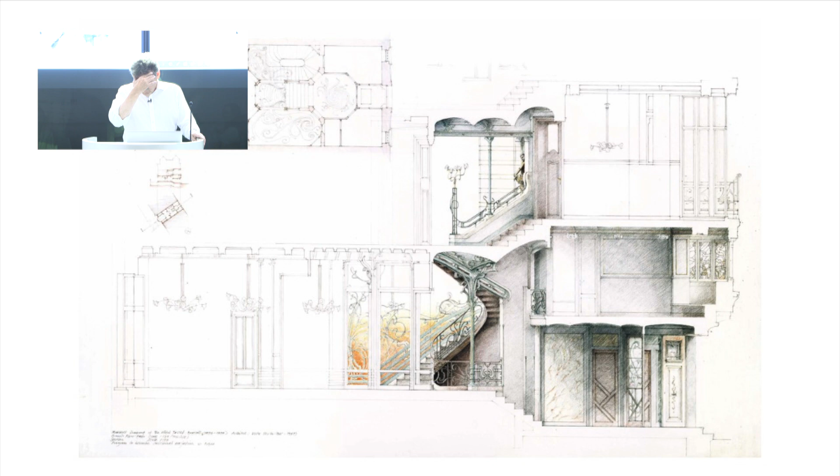I wanted to talk a little bit about that background of making bridges and the interest in materials. This is a drawing I made with a fellow student back in '85, of Victor Horta's Hotel Tassel, which is like the birth of Art Nouveau in a way.

It was a building that had been turned into multi-let, and degenerated—1894 in origin—and then had been lovingly put back together by a group in Brussels, and was about to become the Mexican consulate, as it happened. So we tore in and drew this kind of one-to-one almost, and made this drawing.

The thing about this building, as you can see from the plan, is that it's actually a building between two party walls, very tight. It was for an academic. It was also at the time, obviously, of symbolist poetry, of interest in psychoanalysis and the interior. But it's also the first domestic building to use metal, and the metal opened up the entire world in this.

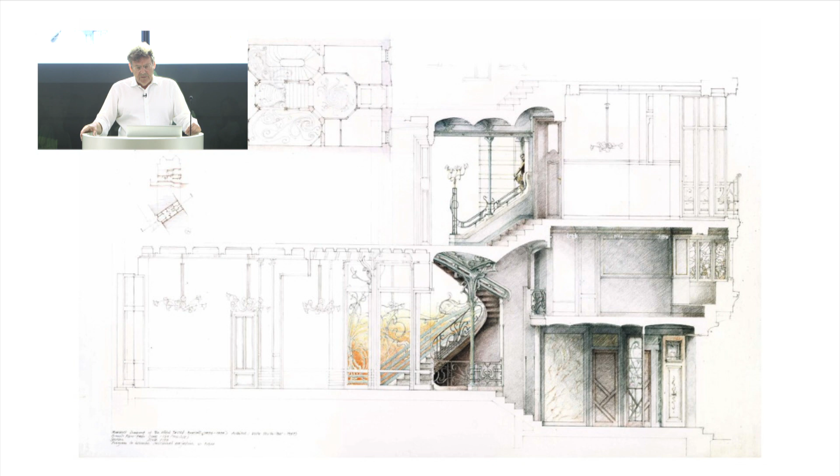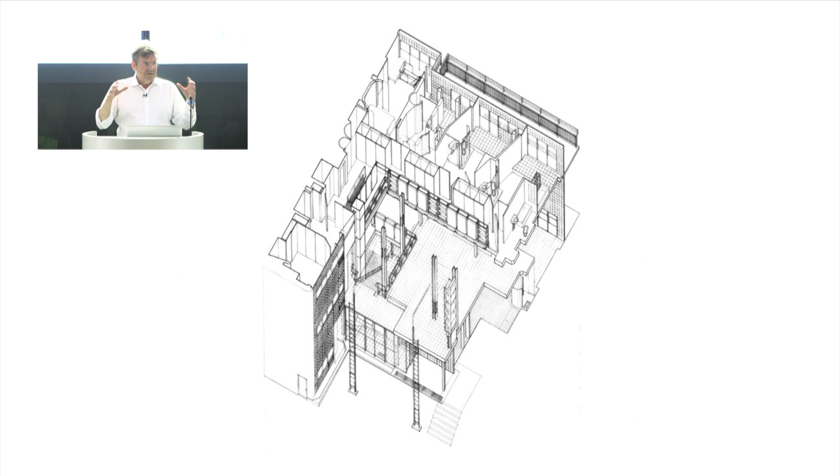So if I was to talk about metal, I would be starting with, no doubt, Horta. I would then be moving to the inevitable sequence of the use of metal with Pierre Chareau and the Maison de Verre. I suppose what I'm saying is thinking about the use of material in its cultural context, because these moments are fascinating in terms of the way they tune in to a particularity of place.

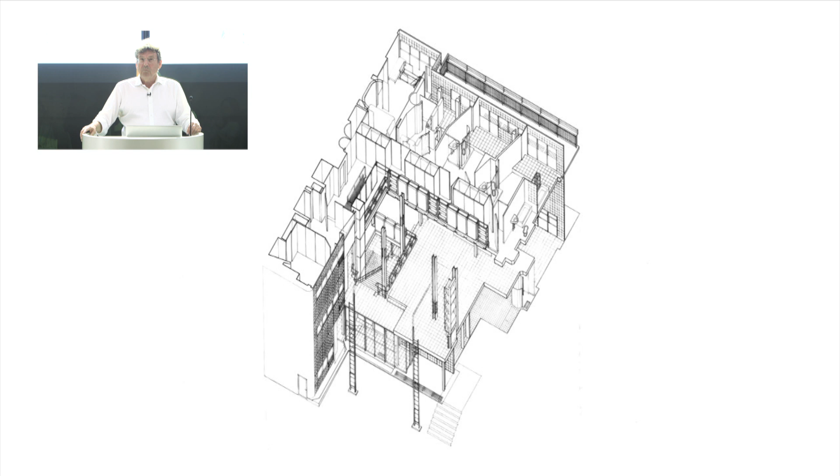You wouldn't have Victor Horta and the Hotel Tassel without party walls and terraces and a particular urban structure. It wouldn't make sense. So I suppose the question I ask is: when we think about ceramics, how do we culturally think about ceramics? Where is it critical? From my own background...

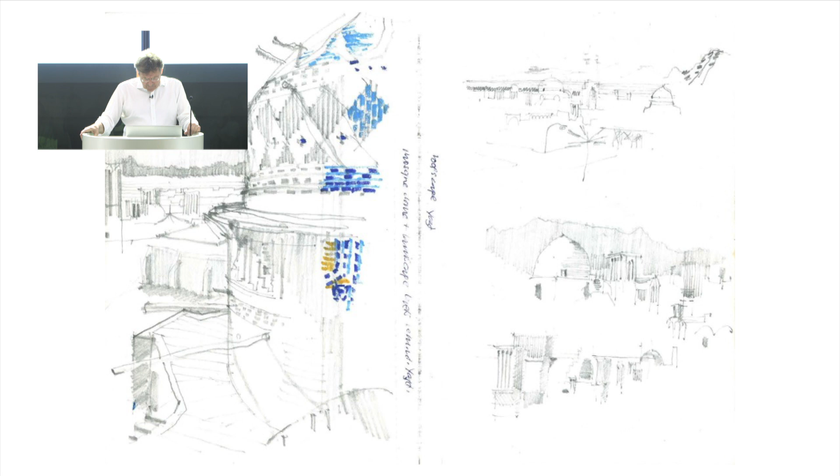I spent a year looking at nomadism in Iran. These are a couple of pages from a sketchbook from 1974 in Yazd, Iran.

You get up into this world, which is basically a desert city built into the ground, with these famous badgir, the wind catchers, which you can see in the silhouette of distant hills. The water comes underground to cisterns, so everything is subterranean, but then it bursts vertically, in this incredible way—something about the baked earth, domes, a lack of timber in that circumstance, the earth and the sky, and how one mediates between the two. There's this incredible tradition in Islamic architecture, particularly in Iran.

If you've been to Isfahan, you'll have seen these extraordinary ceramic-clad earth structures that give protection but also amazing beauty in terms of their craftsmanship, incorporating—given the question of iconography and Islam—word, calligraphy, and plants, a kind of heavenly place on earth. It's a very, very potent condition, an example of the use of ceramics.

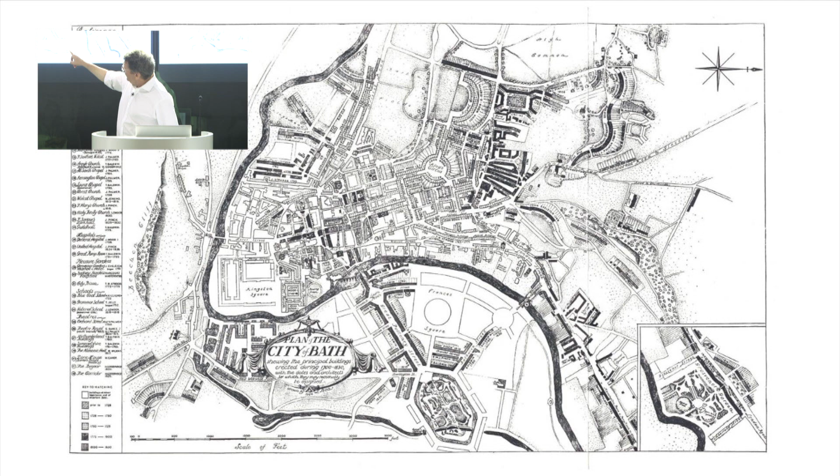Within the lozenge there's a sort of intestinal-shaped garden, which is actually a pleasure garden. The pleasure garden in the English context, particularly in the 18th century, is very important.

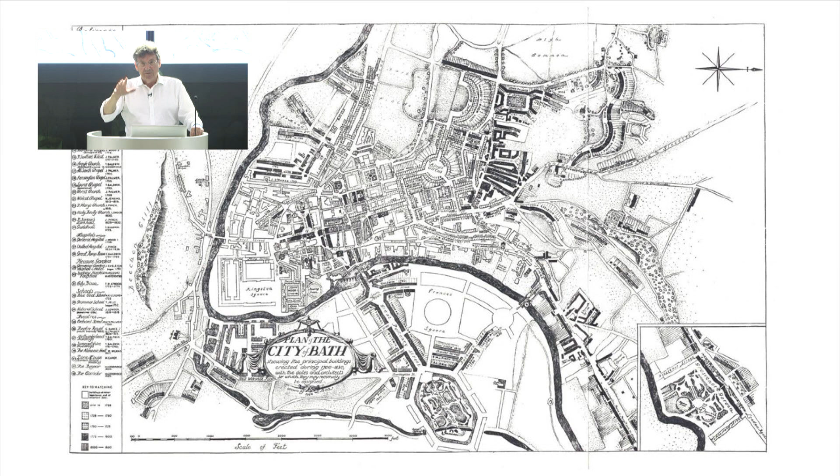This was pre-railways—you couldn't get to the coast, you couldn't get to the edges further afield. So the pleasure garden was a place that at twilight would become full of apparent bird song, actually completely artificial.

You'd have an orchestra in there somewhere. You went from that classical facade through the building and came out on the other side to these dining boxes arranged in a great arc on either side, with a veil beyond. You heard music coming from the band playing above you—it was all about the inversion, the artificiality of pleasure within a town, an artificial nature.

But then it declined with the railways and became this rather dull facade, remade by a worthy architect who changed the building to house a beautiful little collection belonging to a traveller called William Holburne. It's now a museum called the Holburne Museum.

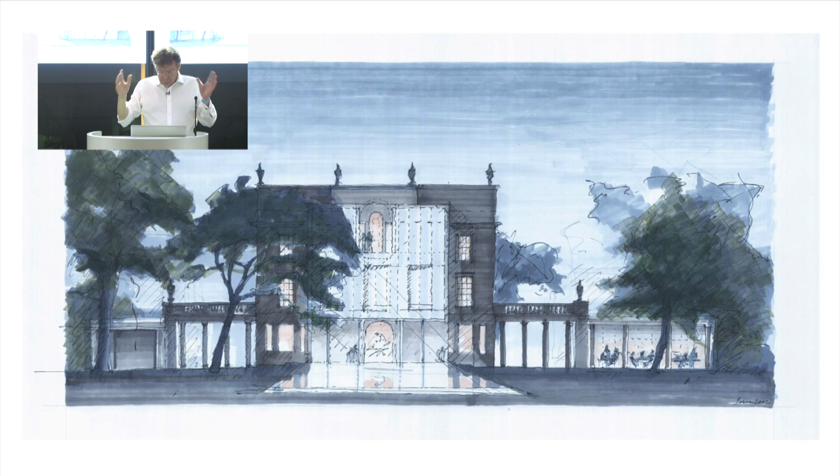My first instinct was not to use ceramics—it was glass, and timber behind—but the idea was that you'd be going from a rather solemn classical exterior into this wonderful garden.

Very briefly, the existing condition was the building left by Blomfield, who had blocked the axis through which you used to come. This is a listed building, so it's sacrosanct—one of our jobs was to pull the stair to one side so you could re-engage that passage.

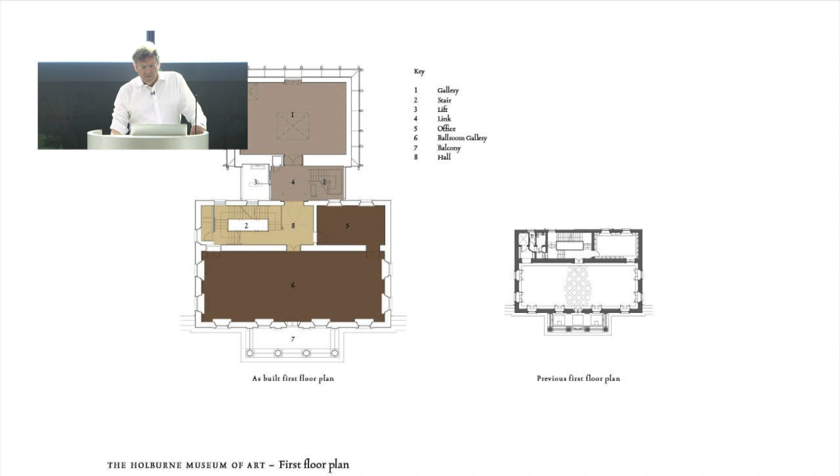I'm not going to dwell on it at great length—then you proceed upstairs. He did bequeath some very beautiful big rooms, and connectivity across the garden is uppermost.

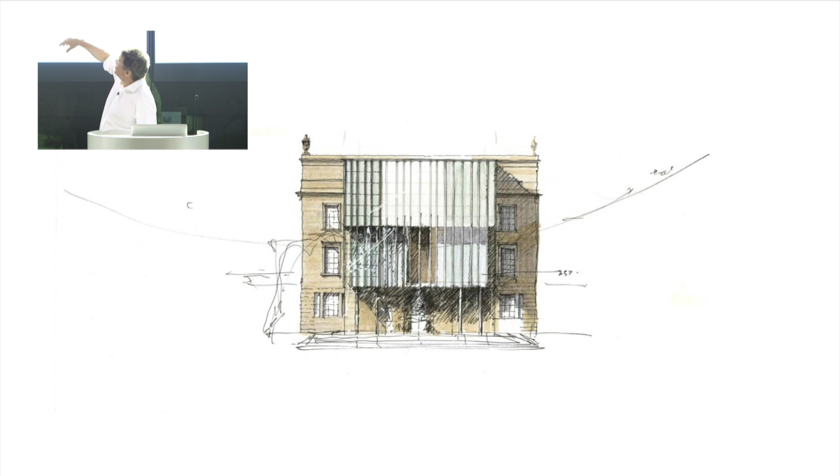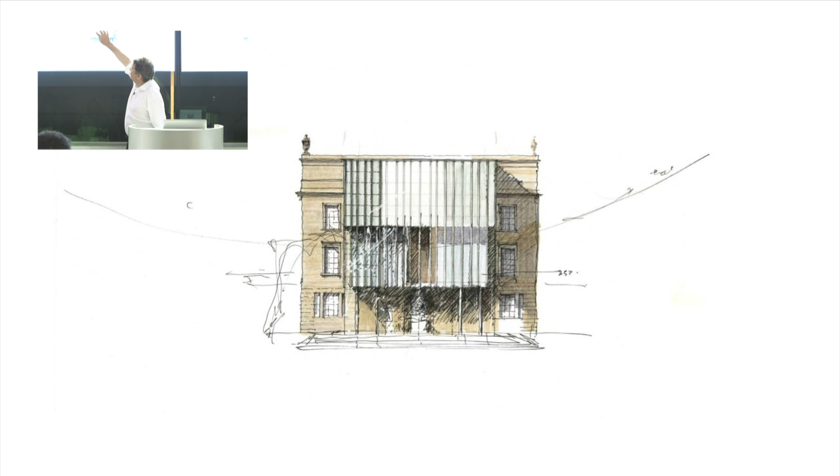So this was my first sketch, and I was interested in reflection and something that would levitate. This first sketch was about a tripartite idea, remembering that competition sketch, which had got to the point of thinking about a closed box at the top, top lit, as an exhibition space for temporary exhibitions, upon which the lifeblood of a small museum works, housing the Holburne Museum, the original collection in between, and then a very open public space at the bottom.

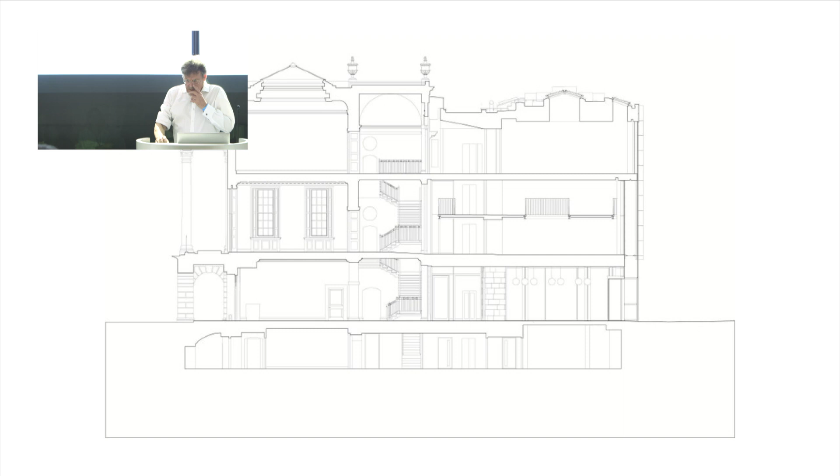And I started to think about ceramic, and that was an interesting perception, intuition. This is the section through the historic building and the new building with these levels. I say it was interesting because,

touching this building, and conservation is very big, here and also in the UK. And I think at the first planning application, we had 1,200 respondents. Probably that doesn't sound like a lot, but 1,200 people writing, mostly to bitterly complain. So it failed on the first round and then finally got through.

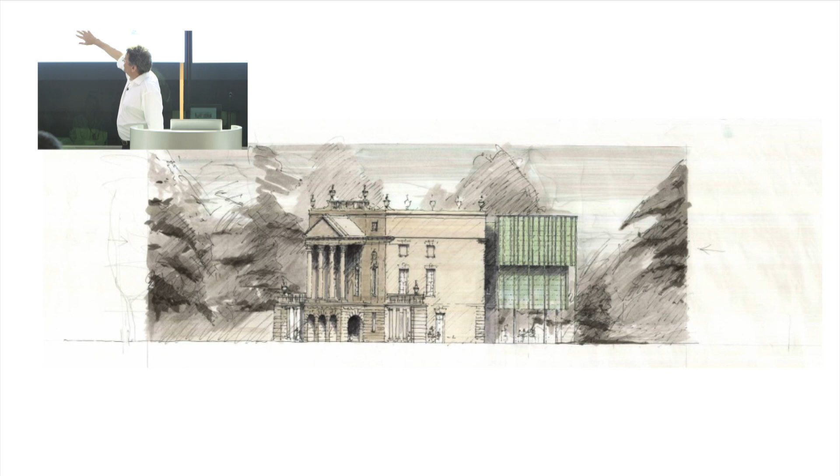But it was about inverting the idea, because it's a Janus-headed project, classical frontage, pleasure garden on the other. Stone works in a way that gathers weight through rustication from the urns that are the connection to the sky. Ceramic, I was very happy to levitate. It's somehow artificial, so this idea of ceramic was interesting to me.

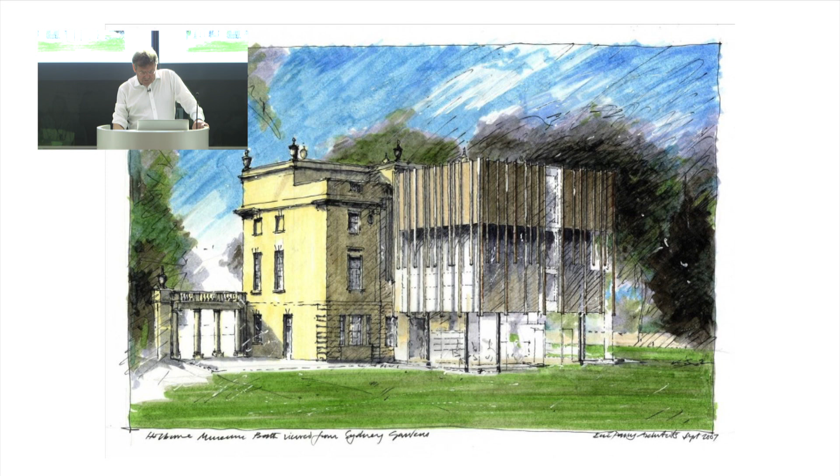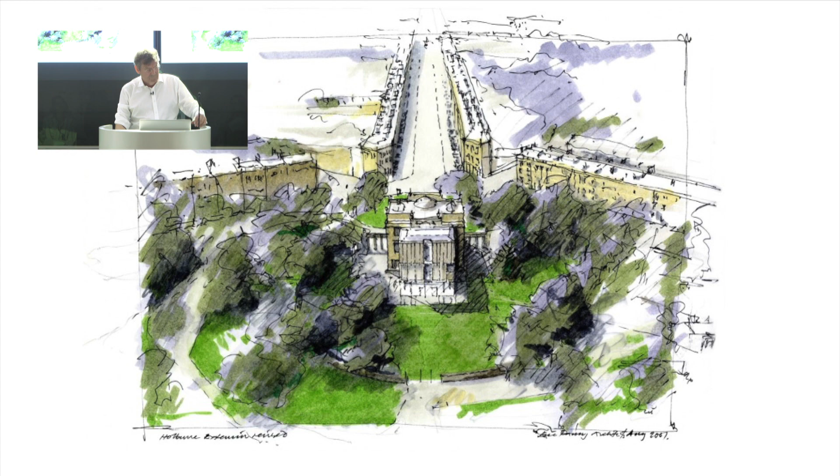But in the first instance, the powers that be determined that if it was going to be ceramic, then it should look like stone. So there's a big problem. This drawing is about the difficulty of that. And I needed darkness to reflect the trees and the sense of nature, to give a kind of mystery.

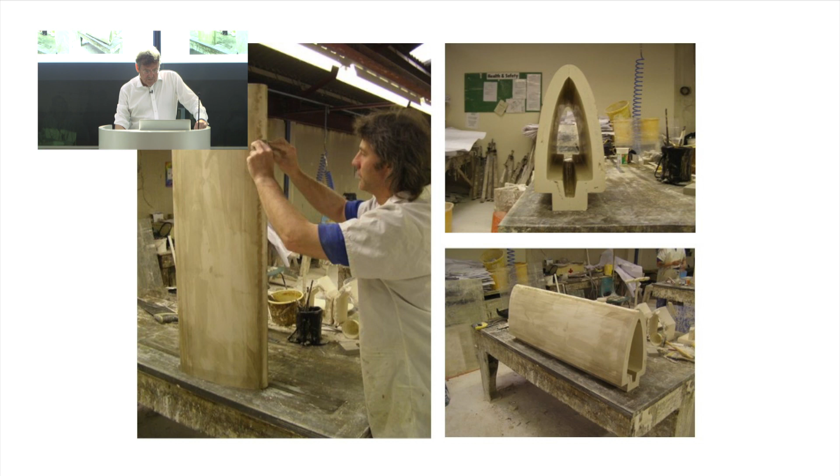So anyway, it went to Shaws of Darwen, who won the contract. It's slip-form material. They produced some early glazes, which were very light.

I was talking about the ambiguity of the color, the eye that has a certain kind of depth, the character of the surface. So I was interested in depth, but I wasn't getting there.

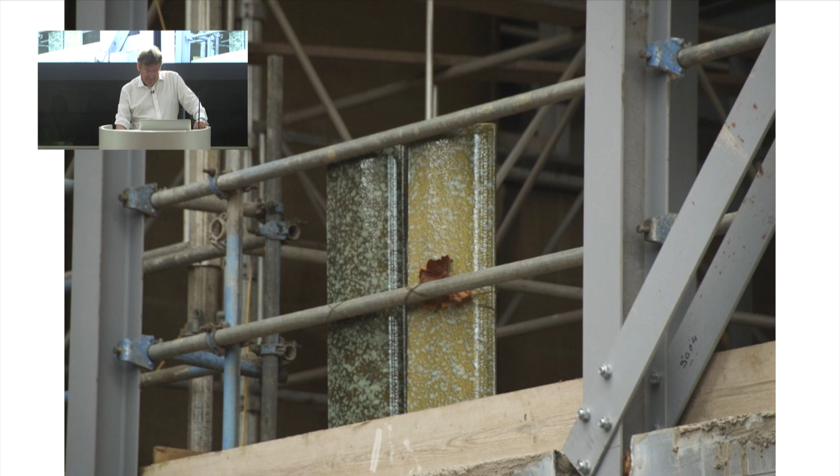And then we started to get to where I wanted, which was a manganese oxide, deeper color underneath, and a titanium white that was placed on top. So the left-hand sample begins to get closer to where I wanted.

And I persuaded the people that the buttery stone of Bath isn't necessarily the case when you get to the north-facing shadowed world. I mean, stone is not something that is uniform. So I was arguing this as a way of progressing.

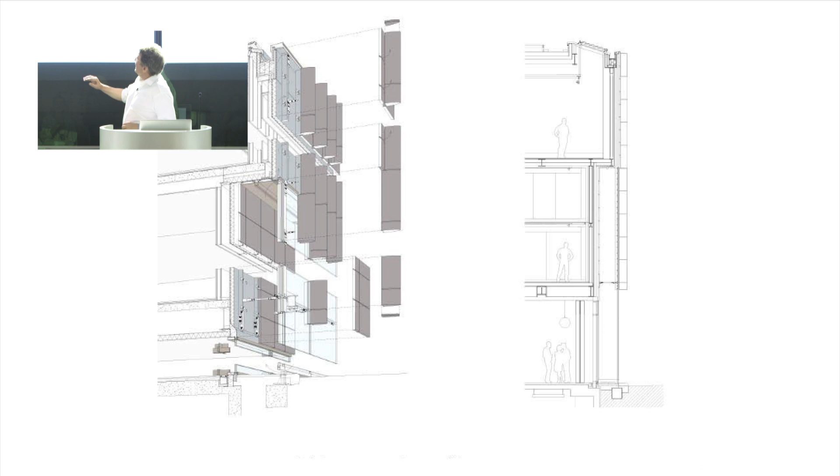So to the construction drawing, which is essentially, I didn't want the exhibition of a grid, as it were, on the ceramic. So these finials cover the vertical grid and allow a kind of ordering that is vertical to exist. On the outside of the top layer, the secondary layer has an inner lining of ceramic panels, all slip-formed. And then below that, it's glass and glass, it's glass and ceramic, it's ceramic. So that tripartite sketch starts to manifest itself in this way.

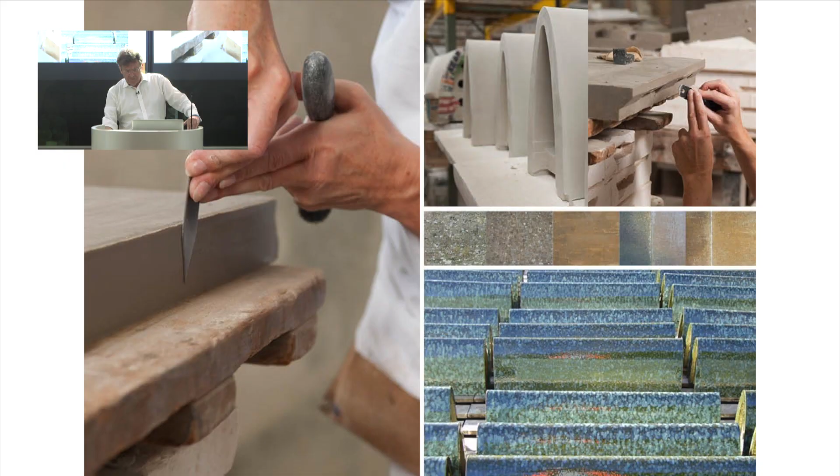And this was the process that we know, understanding it, everyone is focused around the material in the room. And then the question of how the glazes, a double glazed, once fired technique developed to create that sort of sense of lack of consistency. It's using the glaze as something haptic, crafted, and here the finished article sitting in its garden setting.

The thing that this doesn't show is that there's something very beautiful about being in the space with the movement of trees that immediately gets picked up in the ceramic and the glass in different ways, creating very interesting shadows. So there's a depth, there's a layering, there's a sense of protection of the very precious things that are within. That changes through the seasons and through the day.

So the result has a certain kind of, maybe going back to that sketch, an idea. The structure is taken off the corners so that the bottom works with the environmental glass behind and a veil of glass drawn down on the outside, to create the calibration vertically in that tripartite way and to create this resonance with the landscape.

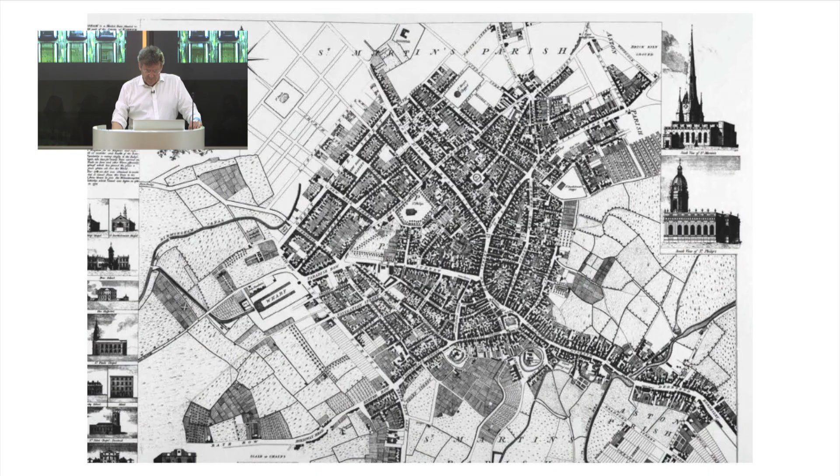But the other question in my mind is where can you take the material as extruded. So the Holborn project was small, quite expensive. Piccadilly was expensive—it's all hand-set in lime mortar, so your substrate has to be very strong, in the tradition of the use of faience in steel frame buildings.

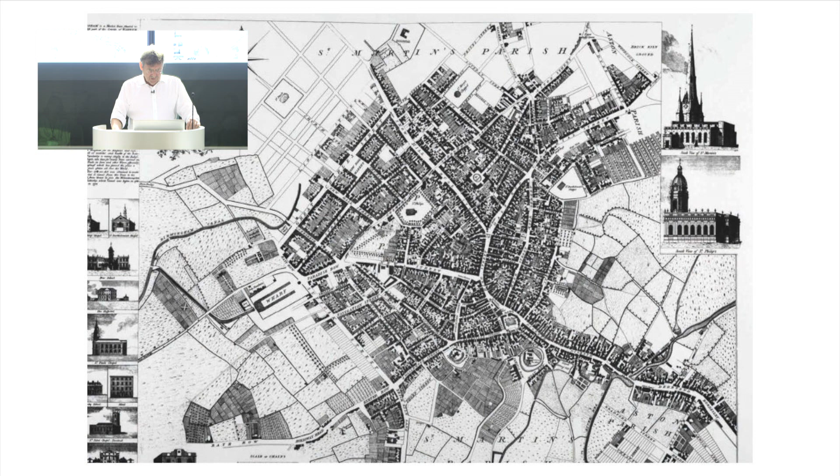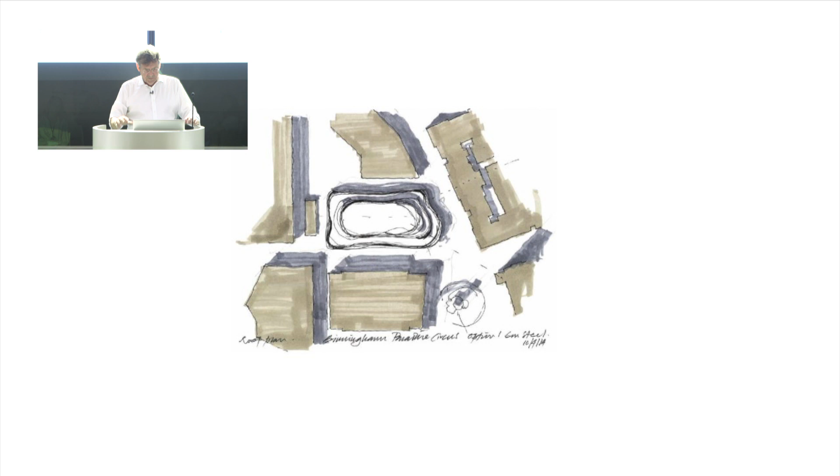We had another challenge in Birmingham, UK, with a set of buildings, new buildings near the historic centre. I'm just showing an early sketch, which was the plan form, or an idea for a plan form for a building that sat on its own but wanted to respond to a lot of different tensions around the site. So I thought of this kind of more organic approach to it.

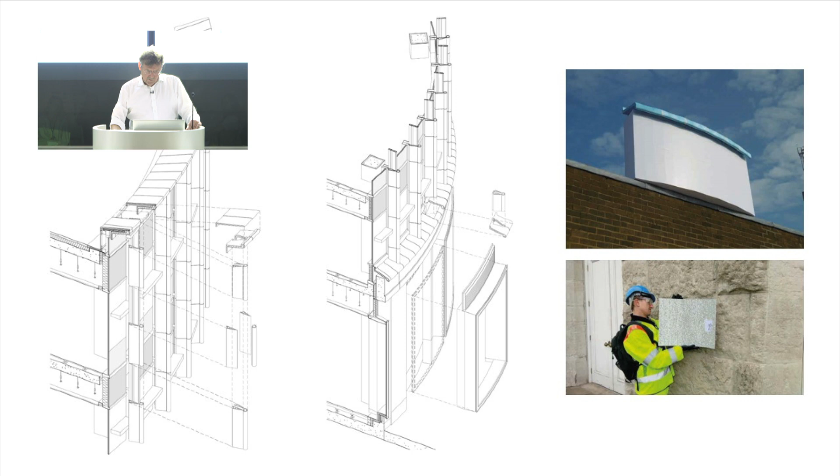So how to, with the budget, use a ceramic material that's extruded, that could actually work as something curved and be assembled in an interesting way.

So on the top right, you see a section of a radius that we built in our studio, with sections of a sill. This was the successful dimension for this radius, of about just under 400 millimeters, where the eye could be deceived with the shadow being faceted but actually appearing on that radius.

It was close to historic buildings, so there's a kind of thinking about the glaze as a simple glaze, learning a little bit from earlier on. This is undertaken with NBK, another one of the handful of greats in terms of production, doing a lot of work coming out of the baguette of Renzo Piano, and his Berlin project—maybe rain screens that are so popular.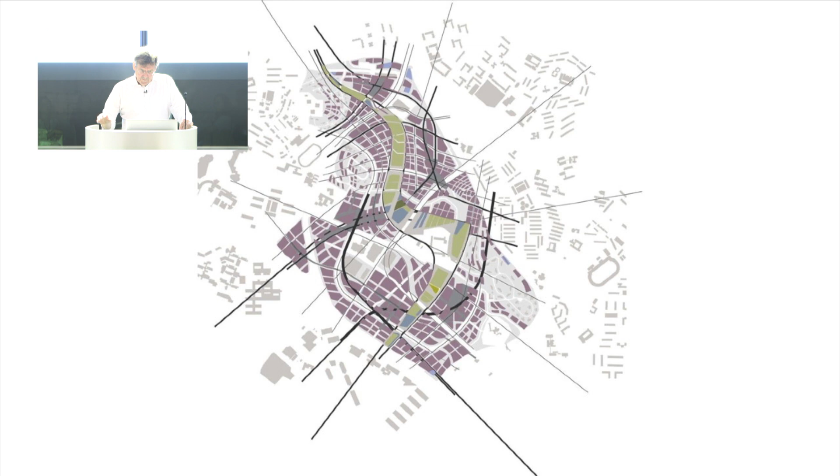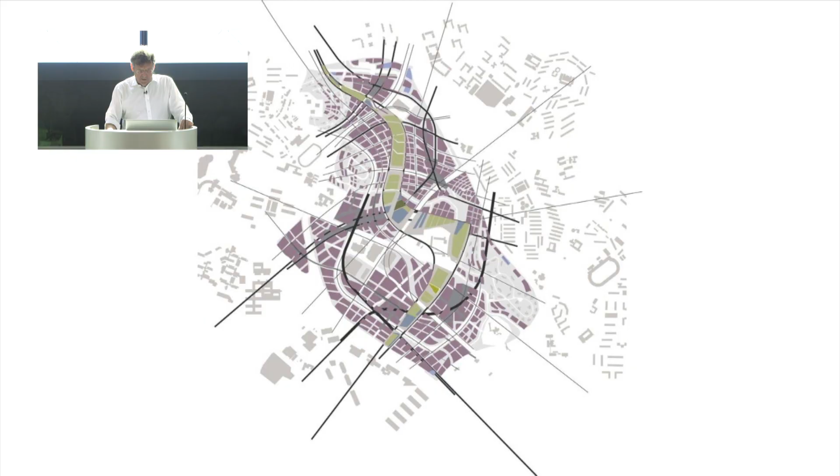So this project is fairly recent and takes that idea of the extruded material on a curved surface a little further. In Singapore, it was a competition—it's in a Zaha Hadid master plan for this sort of technology park. And Hadid's came up with a very good, I mean, you know, very fortunate for a designer, set of principles.

One reason is that because this particular building is next to a park, the public had to be able to walk under the building with a soffit at about 10 meters, and because it faced the park, it couldn't have too heavy a frontage to the park. So inevitably there was a sense of stepping back and lifting. So that's where we got to.

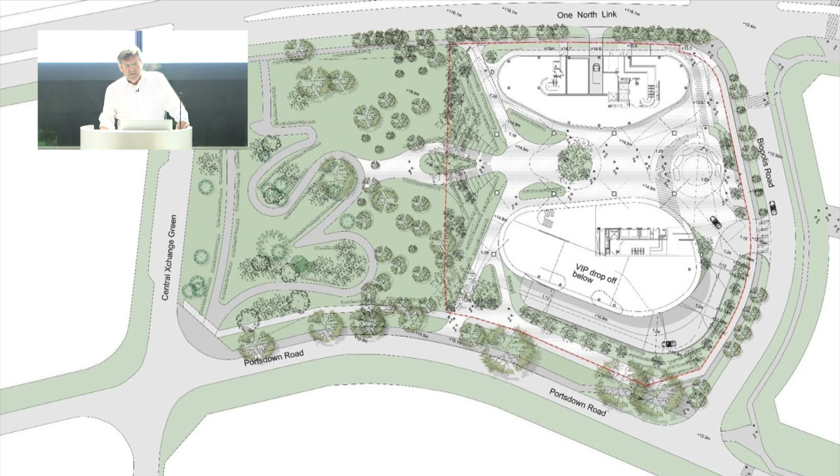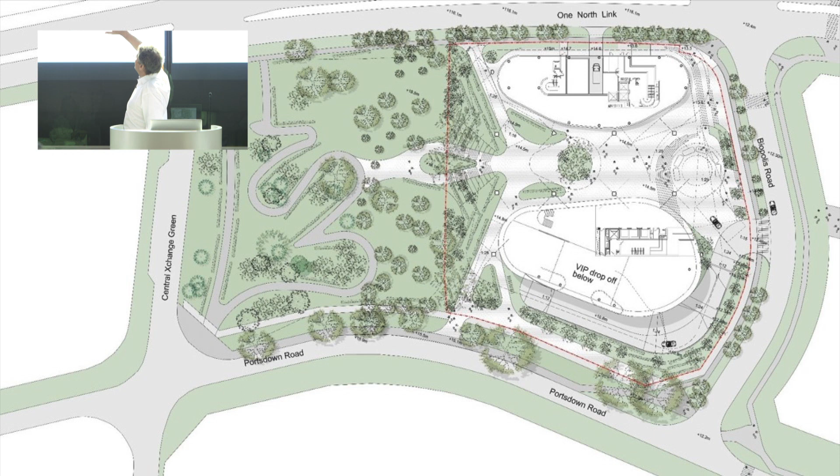Effectively it developed with this idea of passage of these structures, which are trees that pick up a 9-meter grid to a standard office plate above this, with two pods, one which contains an auditorium and is more introverted, and the other that is quite the opposite. It's about connecting, and then the public are walking through and under the building.

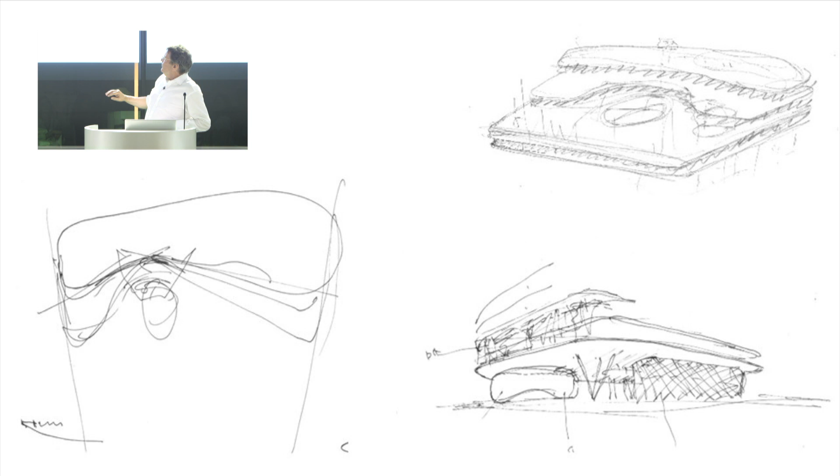So yeah, these were just my initial thoughts about it, that you could have a cushion almost that had the entrance and the auditorium. You could have a woven basket on this side, within which there are two cores, and then there are these inverted pyramids structurally that pick up in order to make a big dimension underneath for the public to pass through, and then it's stepping back.

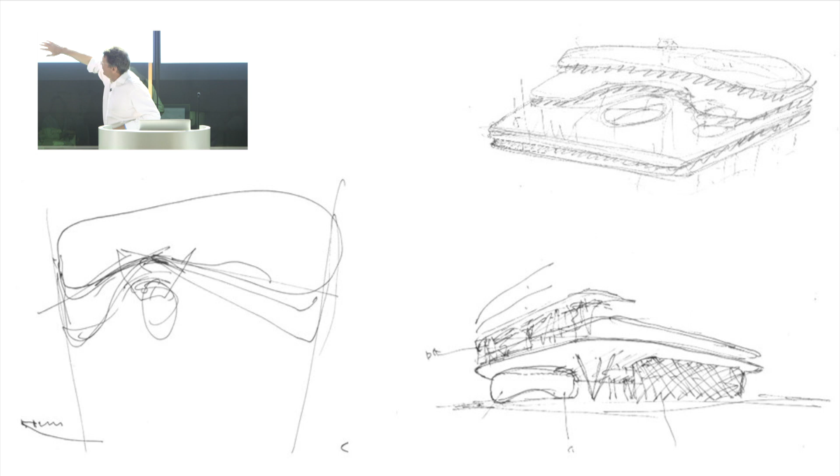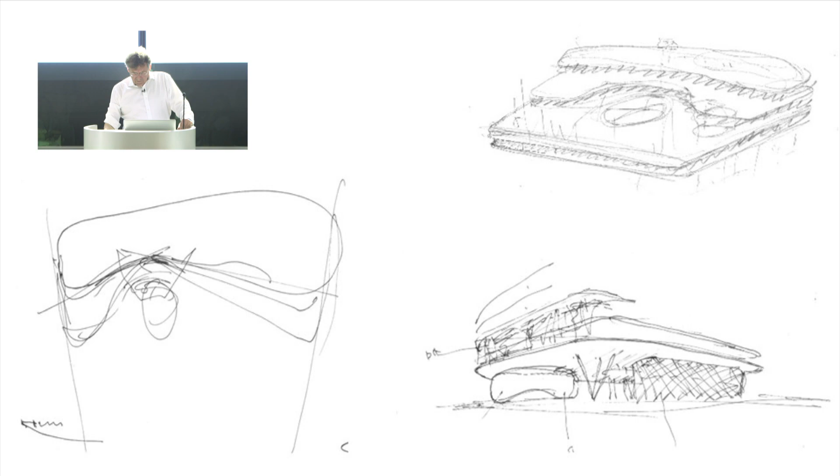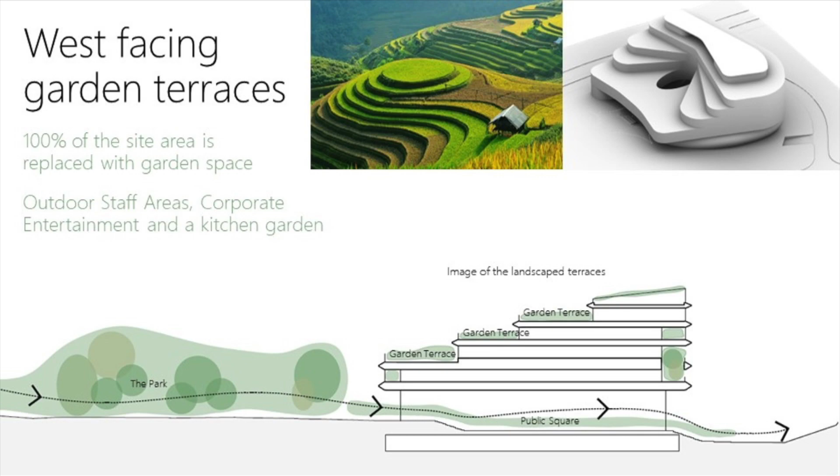It's a large floor plate, so allowing light through it, and planting those terraces to - which they do incredibly well in Singapore. Sort of the sense of the world of laboratory and office that this building is. It's about the agricultural world, and so a sense of terracing again seemed a good response with landscaping.

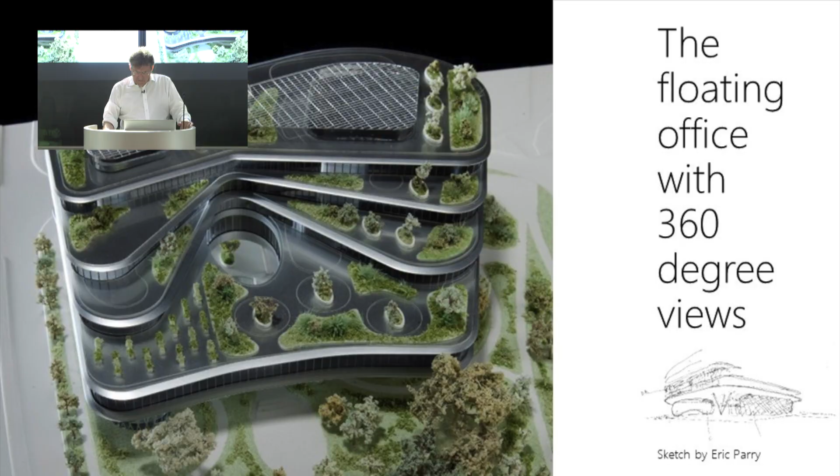And in the first instance, then, in my mind, it was a bit like a set of crockery that was stacked with large overhangs to create the protection that's absolutely necessary in that latitude to create shadow, so as to reduce the impact of solar gain. And so this was the initial model from that competition. At this stage, to be honest, the edge was indeterminate.

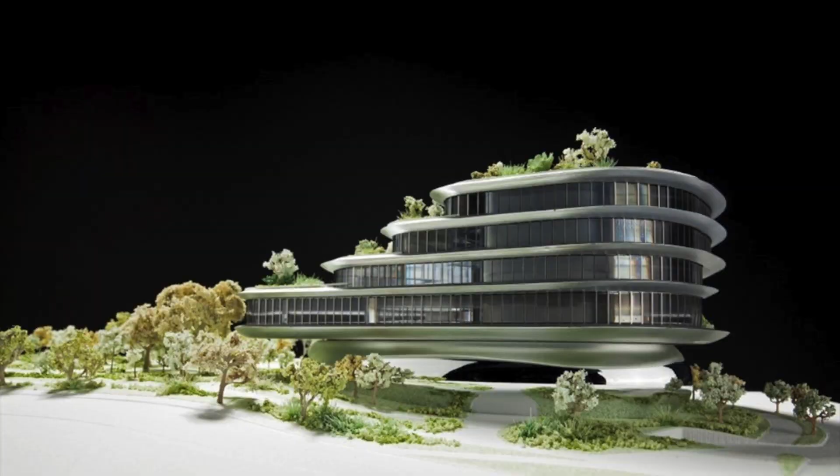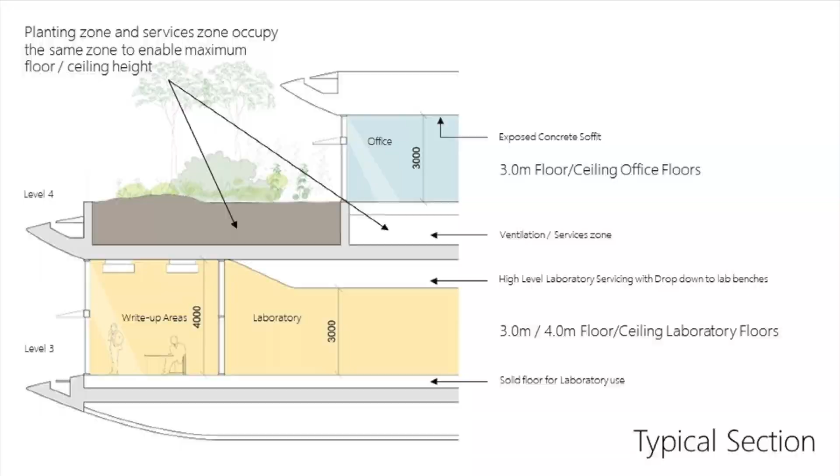There's a sense of creating these edges that are curved, responding to that organic plan form, that would be cantilevered more than 2 meters beyond the perimeter of the building, that would also then allow the terracing and vegetation to be part of the building. And this was the CGI of the cushion.

Looking at the Bean of Anish Kapoor in Chicago yesterday, which I hadn't visited since it was - I mean, wow, what a spectacular piece that is. I shared a flat with Anish in my early days, so it was really rather wonderful to see that piece.

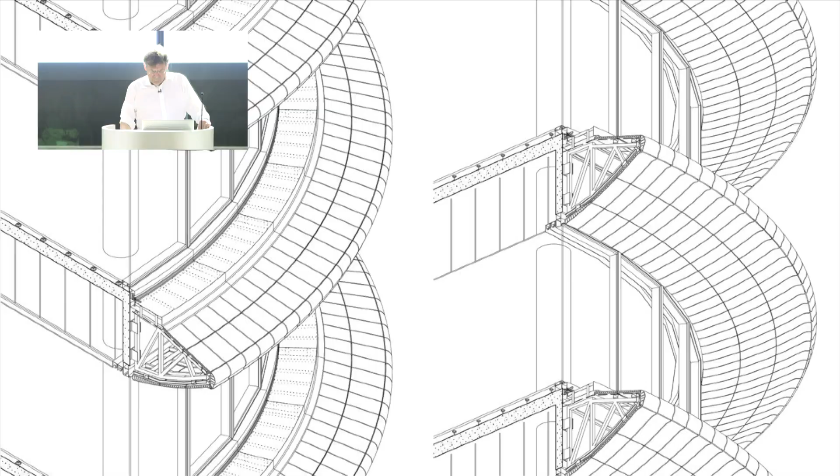But we couldn't do that because of reflection. They're very sensitive about reflection, so it cooled down. But the principle very much maintained. The idea was, learning from Birmingham a bit, that we would create these projections and then create that setting of extruded material that is then cut to radius, glazed, and then assembled, with a sensible number of radii to deal with, and then create the edging to soften that, and then work through the glaze.

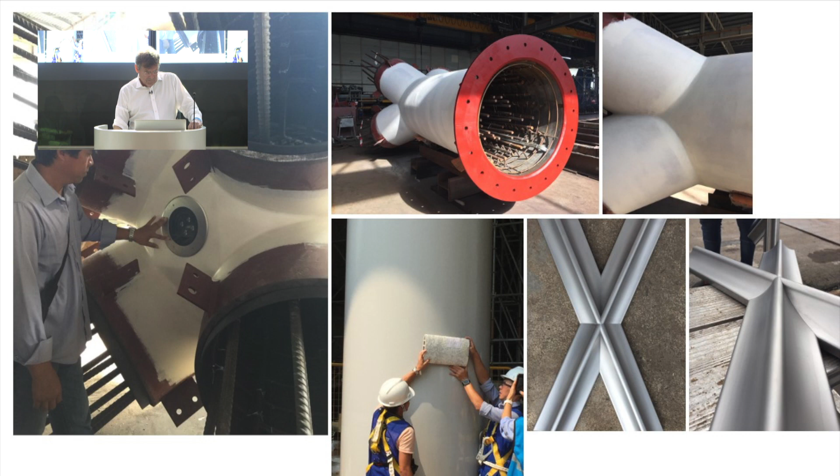So actually, in the prototyping, there was the question of how the joints would work. The beauty of this is that rather than bringing a large piece of material to site and having a very strong joint - as would have been the case with sheet material, with ceramic - there's something very beautiful about this. It isn't as big as it could be, but at the same time the joints are continuous, so it's like a textile. It has a sort of sense of being one, which is very interesting about the modularity of the material, I think. Some elements are more like shipbuilding, like these trees, and the lightness of the weave of the basket.

And indeed, this is working with a company called CN Terracotta, north of Shanghai, working through some of the glazes we'd developed in Birmingham, and this is the finished product.

So it sits within this park landscape, but sets back and gives access for the office, everyone in the office, to these terraces, which is an incredibly important thing these days. Certainly with our projects in London post-COVID, being able to get outside the enclosed, confined working space - and that works very beautifully here.

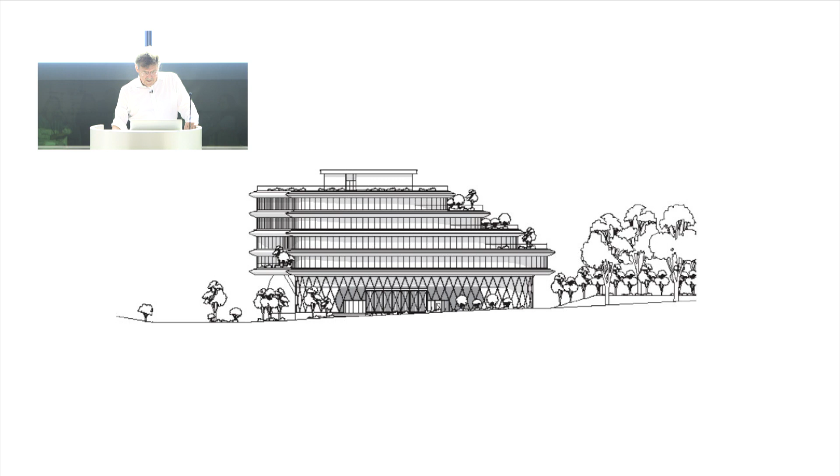So this is the way it developed through its various levels, and here the finished product, which also, under the trees, has this soffit of ceramic that runs under the belly of the building.

So we just end with a very short movie around the project to give you a sense of it in use.

Very soon those trees will be shooting through this space, I'm sure.

So in summary, these are crafted finishes rather than artistic finishes. As for the techniques I know, there may be others out there related, a bit like masonry where you have walling masons and banker masons and carver masons. With ceramic, the molding and slip casting is one, extrusion is another, and here we are in Buffalo with the fabulous possibilities of sculpting, crafting, relief.